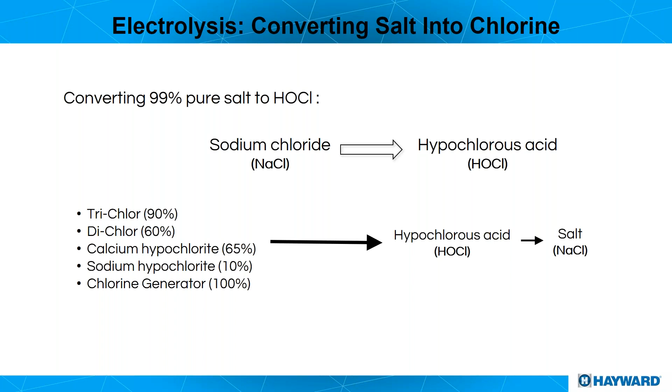How do we do this? We just have to add chlorine and salt to the pool, and the chlorinator will convert the salt into chlorine by separating the molecules. As we know, salt is made of chlorine, and that's the way this is going to happen. Simply, we're going to add salt to the water and mix it in.

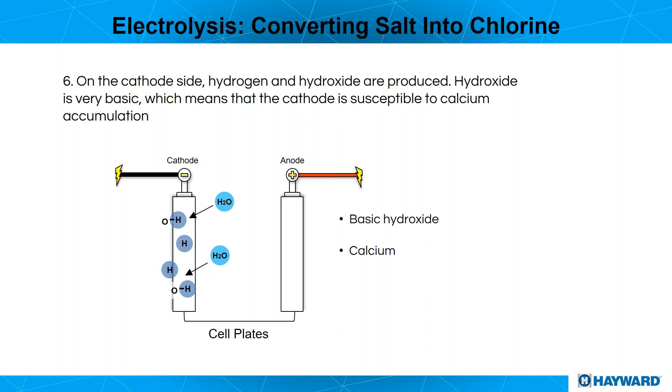There are some plates inside the chlorinator cell that have negative and positive sides, because they use electrolysis and electricity, DC voltage, to separate these molecules. On the side where we have the negative plate, calcium will accumulate. On the positive side is where we separate the molecules of the salt. As you can see, it becomes very negative, the pH becomes very low, and that breaks up the molecules, producing chlorine.

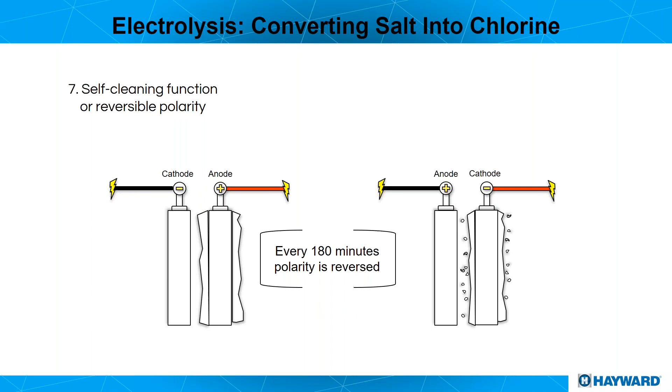Now these chlorinator cells have a 180-minute polarity reverse. In other words, every 3 hours the polarity reverses, which causes the negative side, which became dirty with calcium, to become positive. That way the chlorinators clean themselves - they are self-cleaning cells or plates because of the polarity change.

Now let's talk about chemistry and salt. A lot of people ask, if you have a chlorinator pool since it uses salt, does that mean the water is going to be very salty like ocean water? It is not. Here we can see the parts per million: ocean water is way higher, 35,000 plus, compared to a chlorinator pool, which only requires about 2,500 to 3,400 maximum.

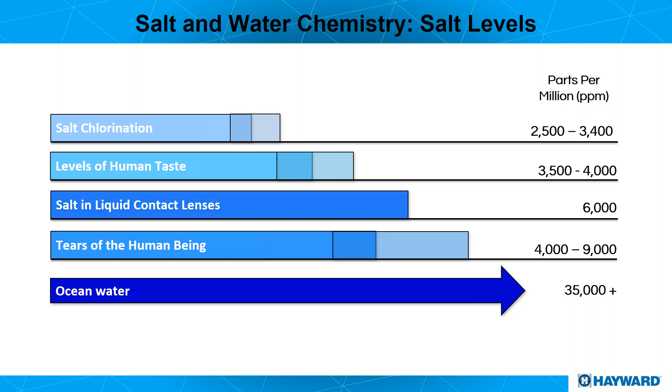If we have a new pool, here's what we need for initiation and verification. We need to make sure the pool is clean and the chemicals are balanced. Then we check our salt level, making sure we're around 3,000 to 3,200, and that we have stabilizer in the pool, a maximum of 50. Stabilizer is very important, because without it our chlorine production will evaporate quickly. On existing pools, we need to make sure we have some kind of metal remover.

After time, there are going to be metals inside of the pool. Same thing, check the salt level. Before we add salt to the pool, we need to make sure what we have, because after time, pools will accumulate salt that comes from the wind, from the sweat of a human, and from other places also.

And then also check our stabilizer level to make sure we are in range. After we have this installed, we just turn on the equipment, and at first the equipment will show 2,800 parts per million. Just give it 24 hours so it can stabilize itself and give you an accurate salt reading.

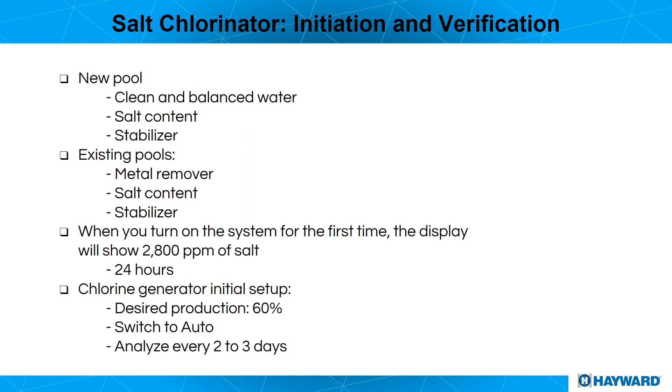Here we can see the table of all the chemicals or the chemistry that we recommend. For salt levels on residential pools, we need about 2,700 to 3,400. If it's not in that range, if it's below, it will give you a very low salt alarm. And if it's high, it will give you a high salt alarm.

Free chlorine, we want to keep it between 1 and 3.0. If it's below, then our pool can get green and be unhealthy. And if it's above, it could produce some kind of irritation in our skin because of too much chlorine. So let's keep it in that range.

pH, same thing, 7.2 to 7.6. Below that, it will corrode anything that is metal. If it's above, it can cause two things, either calcium deposits or irritation in our skin.

Stabilizer, we need to keep that between 20 and 50. If it's below that, chlorine will evaporate fast. And if it's above that, chlorine will be blocked. The stabilizer will cause a lock, causing the chlorine not to do any work. So let's keep it between that range.

Alkalinity between 80 and 120. If we don't have it in that range, then our pH will be unstable. So that's very important too.

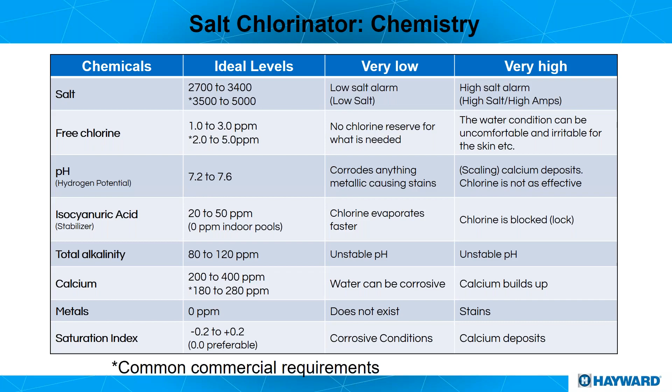As we know, there's two things that will affect our chlorine efficiency. One of them is a high pH, so we need to make sure that's stable. And another thing that is not here, but I want to mention, is high temperature. When temperatures are high, for example in spas, our chlorine efficiency will be less because of the high temperature of the water. So those are the two things that will affect our chlorine efficiency.

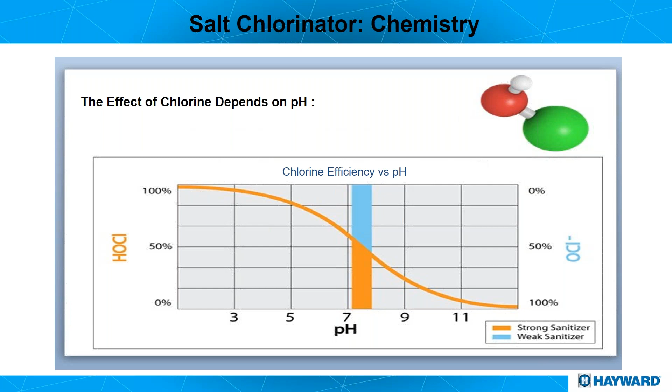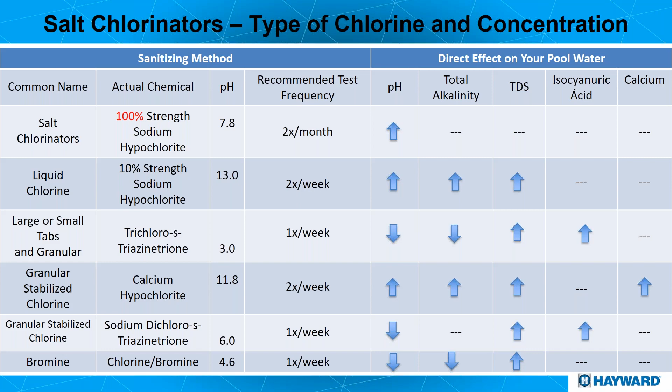And then if we talk about dichlor, dichlor will tend to bring our pH down, our TDS up. It will not affect our alkalinity, and it will bring up our stabilizer. And then bromine, which is mainly made for spas, that tends to bring our pH down, our alkalinity down, and our TDS high.

What types of salt do we need to use for a pool? Simply salt that is 99% pure. You can find this kind of salt anywhere they sell pool equipment, and it's salt already made for pools, so there's not much more to say. If you use that, that's perfect. If you don't, you need to make sure that it's 99% pure.

We recommend not to use the big one, the kind that has little rocks of salt, since it's a little bit hard to dissolve in the water. So the finer it is, the easier it's going to be to dissolve in the water.

Here we can see a salt addition table. You can find this in the installation manual. Otherwise, you will receive this kind of information by email by next week. Here you can see that table, depending on how much salt we have and how big the pool is. This will tell you how much salt to add.

We recommend that you don't add exactly what you see here. Add a little bit less, and then check your pool. If your pool's salt level is a little bit low, you can add more. We just don't want to go above the maximum, because if you do, you're going to have to drain the water so you can add fresh water to dissolve the amount of salt in your pool. So just keep that in mind.

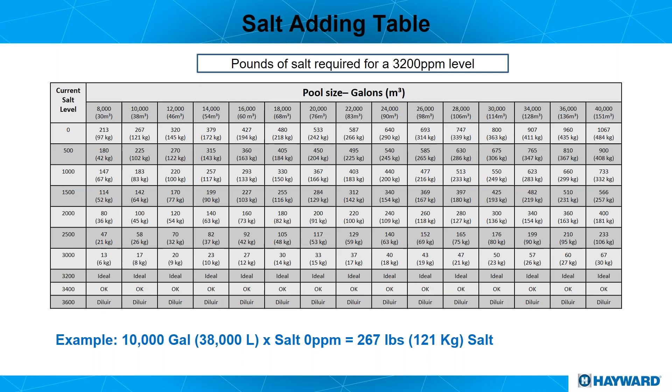Just make sure that you keep this little tube or container in a fresh place, out of the heat. Whenever you pull one of the strips, make sure you close it right away so you can keep them fresh. Remember that these strips will expire after 3 or 4 or maybe 6 months, so try to keep them cool and use them quickly.

Let's talk about the benefits of having a chlorinator. There's a lot of benefits to this. First of all, you're going to be avoiding spikes in the chemistry of the water.

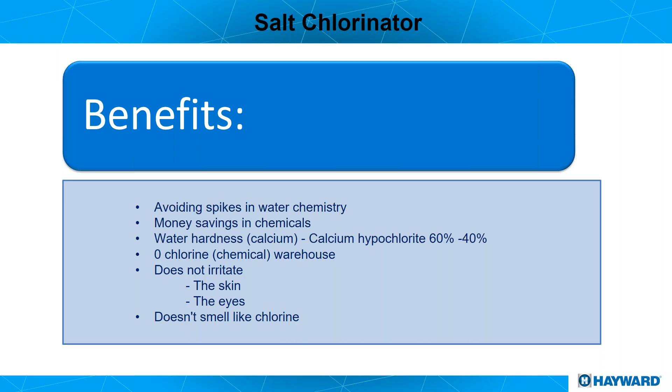Let's talk about products. We have several products in the market, and here you can see them in the picture. We have the AquaRite 900, AquaRite conventional, and the BlueEssence. At the bottom we have AquaRite Pro and AquaRite 100. We'll talk about those in a second.

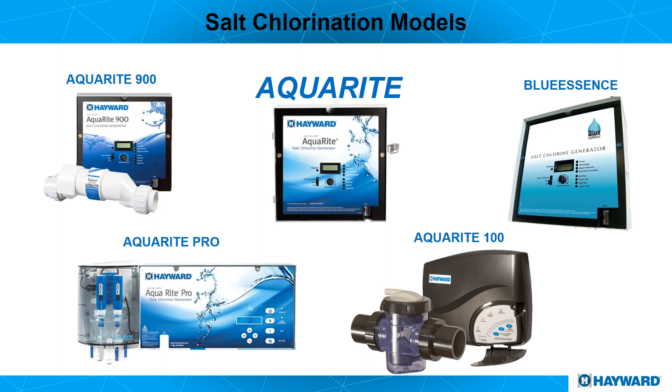Let's talk about the first three ones on top. What is the difference between these three chlorinators? Well, AquaRite, which is the one in the center, has been out on the market for several years. Hayward created the AquaRite 900, which is a very similar product, but with a chlorinator cell that lasts about 25% more.

We know that chlorinator cells have a life expectancy just like a light bulb, so after that they have to be replaced. The AquaRite 900 has a cell that lasts about 25% more than a regular AquaRite, so for the same price you're getting a better product. This AquaRite 900 is not being sold on the internet, only through distribution or dealers, so that's a good thing for everybody in our countries.

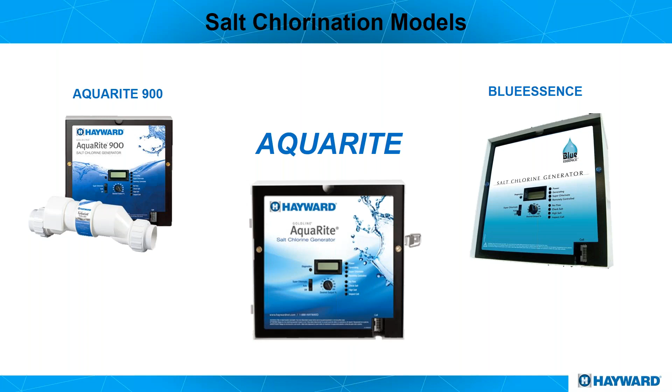Now, BlueEssence on the right side is going to be the same thing as an AquaRite, different label, but it's going to have a better price. I'm thinking it's probably around 30% cheaper. So it's a really good product, just like a regular AquaRite, but at a better price.

Let's talk about the BlueEssence for a little bit. We have two different models. BlueEssence 20, made for pools up to 20,000 gallons, produces 0.76 pounds of chlorine in 24 hours, or 345 grams. Then we have the BlueEssence 35, made for pools up to 40,000 gallons, which produces 1.45 pounds of chlorine, or 658 grams.

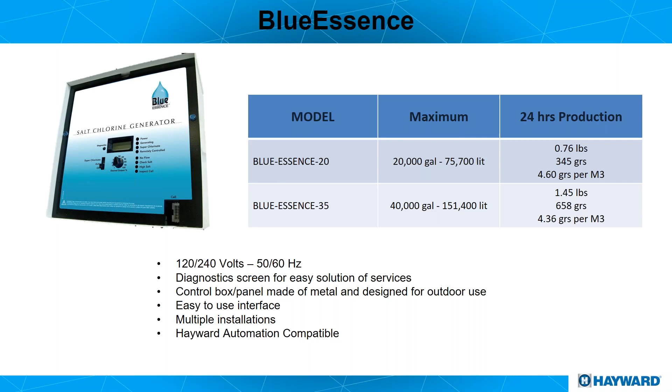It is the same thing as an AquaRite: 120/240 volts, 50/60 hertz, diagnostic screen, control box panel made out of metal, and easy to use interface. We can do multiple installations if we want to, and it can be compatible with automation by Hayward.

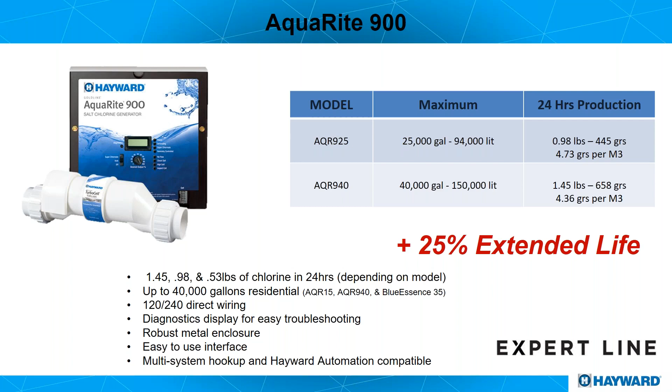AquaRite 900, we have two different models: one for a 25,000 gallon pool, and another for a 40,000 gallon pool. The specifications of the panel are pretty much the same, same screen, same metal panel, and you can also install it with automation by Hayward. The only difference here is that the chlorinator cell itself has a 25% extended life. This product is also not sold online, which is good for distributors and dealers.

If we have to replace one of these chlorinator cells, we can do it. We can place any cell in every one of our systems—it doesn't have to be a specific cell for an AquaRite 900 or for a BlueEssence. Here we can see the reference. All we have to do is program the panel for the correct cell, and you will see that in a little bit.

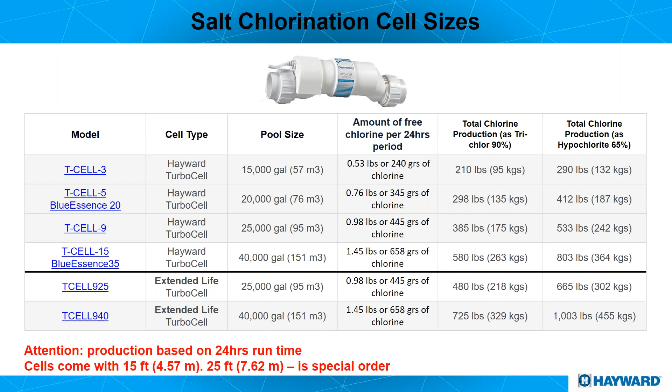Let's talk about operation. First, in the screen, you will see what we call the average salt level. There's a little button that lets you jump between diagnostics. If you ever have a problem with the chlorinator, this will be really important to know so we can determine what the issue is. For example, if you press the diagnostic button once, it will jump to number 1 on the screen, which in this case gives you a 73—that's the temperature of the water in Fahrenheit.

If we want to change this to Celsius, there is a toggle switch, as you can see here. Let me talk about the toggle switch. It's got 3 options: off, meaning the system is off; automatic, meaning it respects the production, and the production of chlorine goes by this little wheel or knob—so depending on where you set this, that will be the production of the chlorine.

Now, what do I mean by production? The chlorinator changes polarity every 3 hours, for example. If we put it at 50%, the first hour and a half of those 3 hours will be producing chlorine, and the second hour and a half will be resting or off. So that's what the auto part means—it respects that cycle.

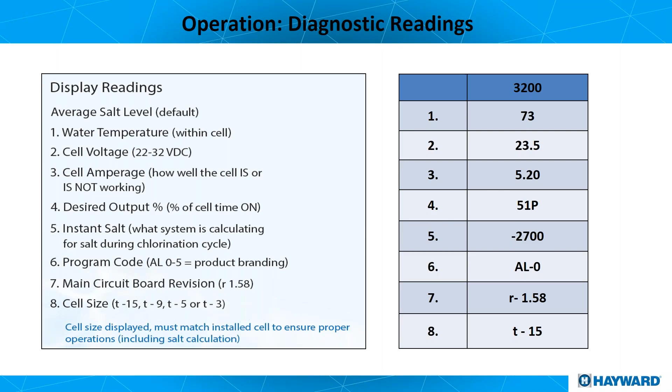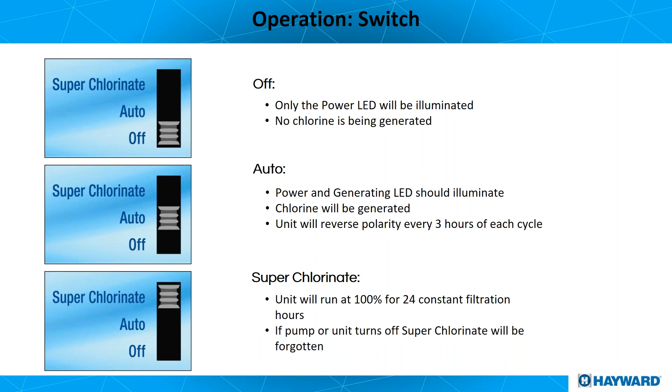In order to change this, all we gotta do is, when we see that on the screen, move the little switch from auto to superchlorinate and back to auto, and it will change. So keep that in mind so we know that everything's programmed correctly.

Every single one of these systems I've been talking about, BlueEssence, AquaRite 900, or the conventional AquaRite, has the same little LEDs that indicate any issue with the system, or simply that everything's perfect.

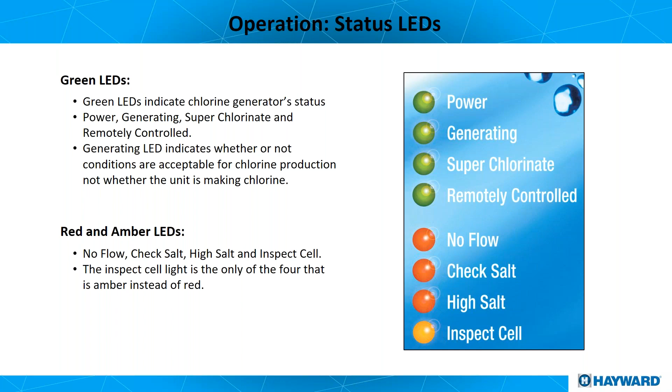The first 4 lights on top are green. The first one means power - we have power, it's energized, breaker is on. The second one means it's generating - whenever the chlorine cell is generating chlorine, this light will be on. If we put it to super chlorinate, we'll see that third green light on. And the last green one, if connected to automation, will light up saying remotely controlled, meaning automation like OmniHub or OmniLogic is controlling the chlorinator.

For the lights on the bottom, the first one is flow or no flow. This light has two functions. Whenever you turn it on, this light will be flashing for about a minute because it's trying to read the flow of the water - that's totally normal. After a minute, it will go off.

If the light is solid red, that means we have no flow. In that case, we've got to check that our pump is on, it's got a full prime, the filter is not dirty, maybe a valve is in the wrong position, or otherwise check the flow sensor to make sure it's not broken, or maybe the connection on the panel could be loose or corroded. We can check those things with this kind of diagnostic.

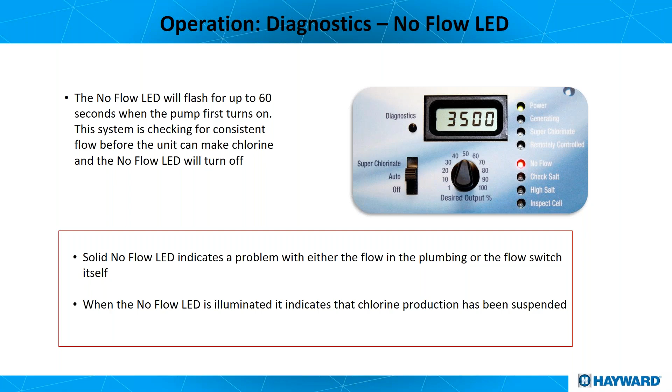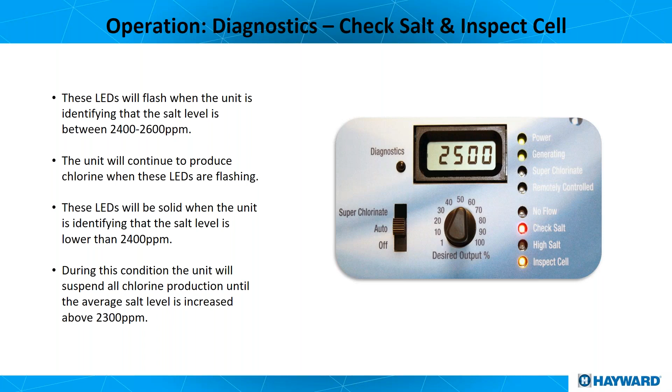If we have a check salt light, that also has two functions. If it's flashing, that means we are low on salt but still working, so it's time to add salt. If it's solid red, that means we are definitely below the minimum and need to add salt before the system works. When flashing, it will still be producing chlorine. When solid, it will not be producing chlorine because there's not enough salt. So it's a matter of adding salt, and we should be done.

And then we have high salt, which means we are above the maximum. Now let me give you a little tip here. Before we add salt, or before we drain the pool because we had too much salt, I recommend we test the water with some secondary method, like a little salt strip, just to make sure the system is reading the correct salt level, just for giggles. Every 3 months or every 6 months, we should do a little test on the side so we know the system is working and is actually accurate.

And then we have inspect cell. We have two functions with this little light. If it's flashing, that's normal - it will appear every 3 months, or actually every 500 hours of working, just to tell you it's time to inspect the cell. Take a look - if it's dirty, clean it. If it's not, don't clean it, just put it back in the plumbing.

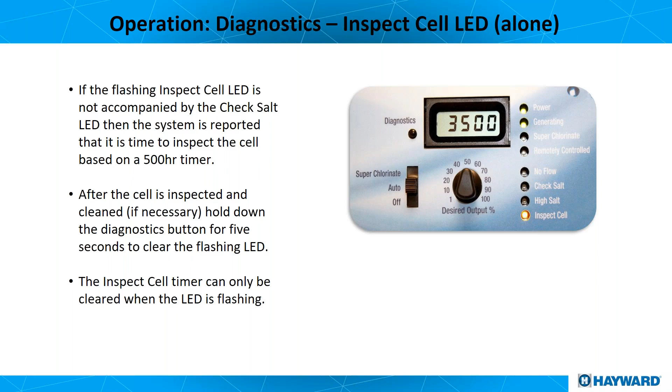To reset the light, we just press the diagnostics button next to the screen for 5 seconds, and it will disappear, then come back on after another 500 hours of work time. If it's solid, then we definitely have an issue, and most likely the cell is dirty, or the cell has come to the end of its life. So when you see it solid, check your salt level, make sure everything's perfect, and then inspect the cell and clean it if necessary.

If we want to connect this to automation, to an OmniHub, we can do that now - we just need this little board. As you can see on top, this board is the communication between our salt chlorinator and our automation, either OmniHub or OmniLogic. This board has two little connectors with 4 wires. The one on the bottom connects to the board itself, as you can see the board has a plug for that, and the top one goes to our automation system. That way we can control everything through automation.

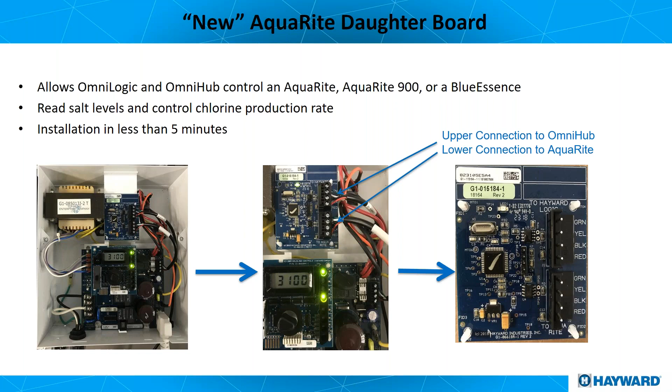Through our cell phone, we can see the salt level, raise the production, or see if we have a little issue with the system too. So we can see everything from even a cell phone.

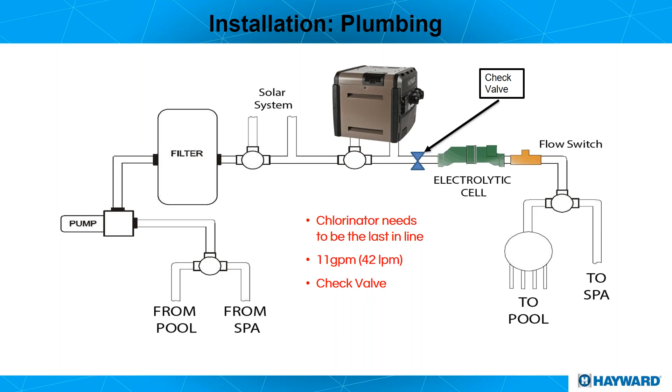For installation, if we talk about plumbing, we want to make sure the chlorinator cell is the last thing in line. We don't want free chlorine flowing through our heater, for example, so it needs to be almost at the return line going to the pool. We also recommend a check valve to provide blockage so the chlorine level, when the pump shuts off, does not back up into our heater, accumulate in the heat exchanger, and damage it. So a check valve is recommended. Also, the cell has a minimum of 11 gallons per minute. Keep those things in mind for a good plumbing installation.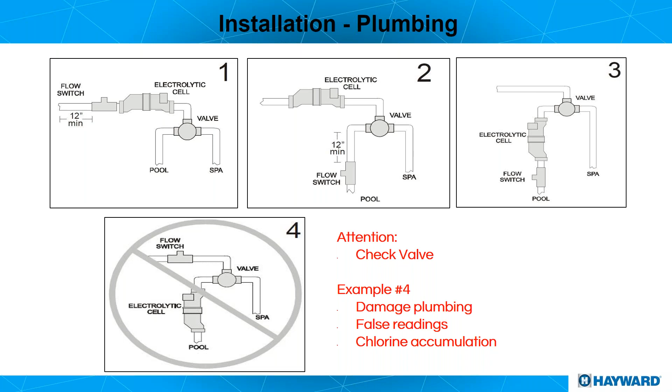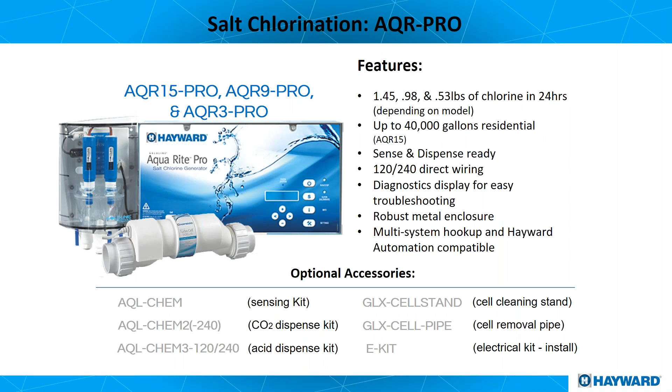Now here you can see the specifications, also 120 or 240 connection. Different types of cells that you can put into this system. It goes up to 40,000 gallons, metal case, so we have no issues with that. And also it can be connected to automation.

There are 4 little buttons: simply to turn on the power of the system, super chlorinate, read all the diagnostics with that I button, and then settings and configuration, where you can set up what pH level you want and at the same time what chlorine level you want through ORP.

For this system, you can add any of these items. For example, an acid tank, or if you want to control your pH through CO2, you can put a CO2 kit. We also have a dummy cell, electrical kit, cell cleaning base, and obviously the sensor kit that you see on the top left.

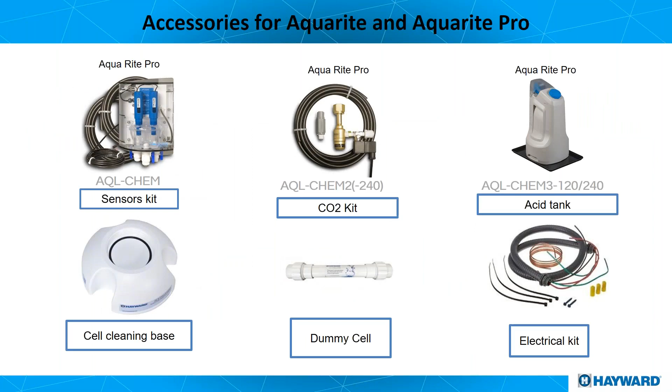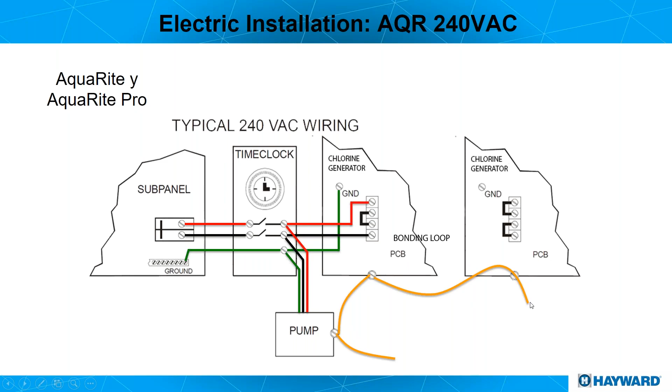Make sure when you do this connection, the chlorinator can be connected on the outside of the time clock or the output, so that when the pump comes on, in case of single speed pumps, the chlorinator will be on. We can do that, but what I do want to mention is that every one of our systems, besides ground, needs to be bonded. You can see here that we have a bonding wire on the bottom of this picture, and on the next one I'll show you, we also have that bonding wire. That is for safety, so keep that in mind, please.

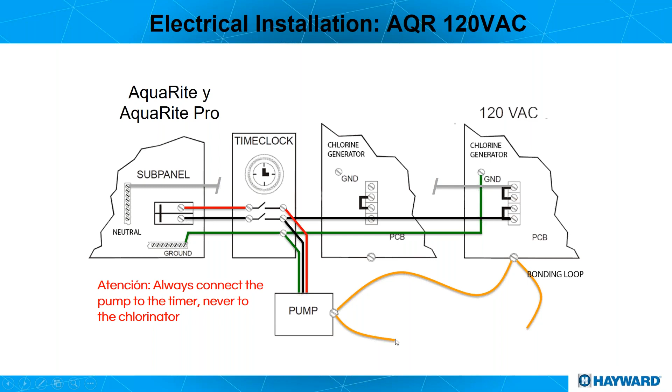Grounded and bonded. We can see here a connection for 120 that also has ground, which is the green wire, and then also has bond.

Let's talk a little bit about AquaRite 100. This is a new product. This system is made for pools up to 30,000 gallons or 87,000 liters size-wise. It produces 1.2 pounds of free chlorine in a period of 24 hours, or 544 grams. This system, besides that, is plastic, so that's good for salty areas. It can also work within a bigger range of salt, going down to 1500 parts per million and still work, or up to 4500 parts per million. This chlorinator is ideal for fiberglass pools or vinyl pools, and also for small concrete pools.

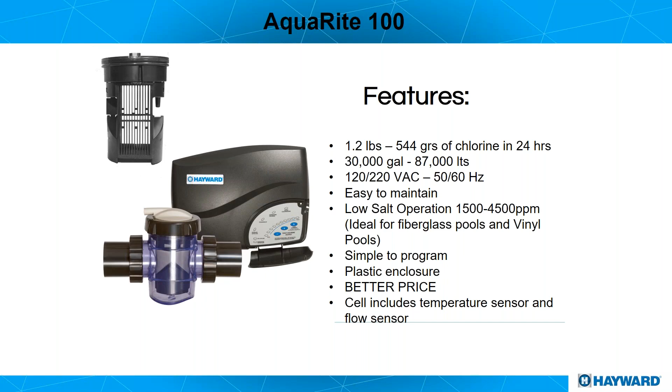The little body of the cell is see-through. That way we can see when the cell is dirty without having to pull it apart. And it's a very simple installation.

Let's talk about that. All we got to do is simply mount the controller on the wall, 2 screws on top, maybe 1 or 2 on the bottom to hold it in place. You plug it into the wall or into a breaker, and then you do a little bit of plumbing. You plug the cable or the connection to the cell, and you're good to go. Very simple unit, very simple to install.

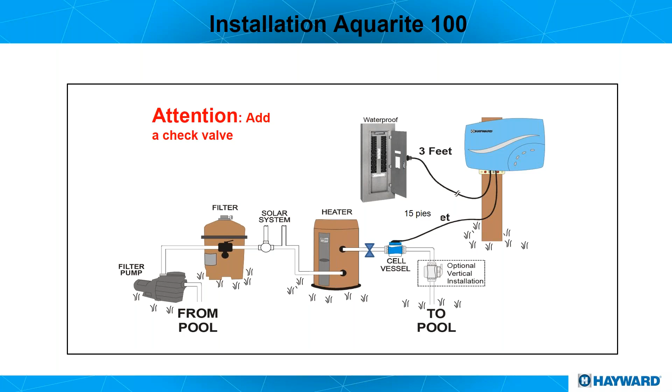If we've got to do a 120 volt connection, that system comes with 5 wires. The green one we know is ground, and then we use the white one, which is neutral, with the red one, and we attach it to the neutral. On the high side, or the hot side, we use the 2 dark wires, the black and the purple. That will be a connection for 120.

If we do 240, then we use the black for 120 and the red for 120. The green is ground, and then the purple and the white ones, we just wire nut them, and we're good to go. Very simple connection.

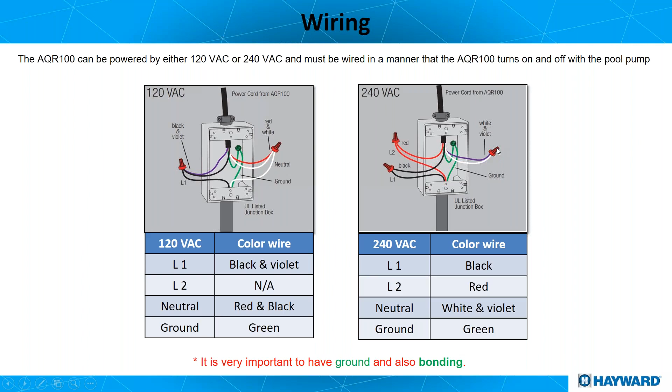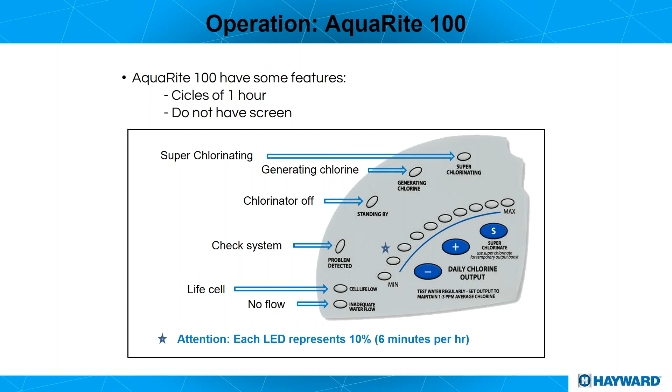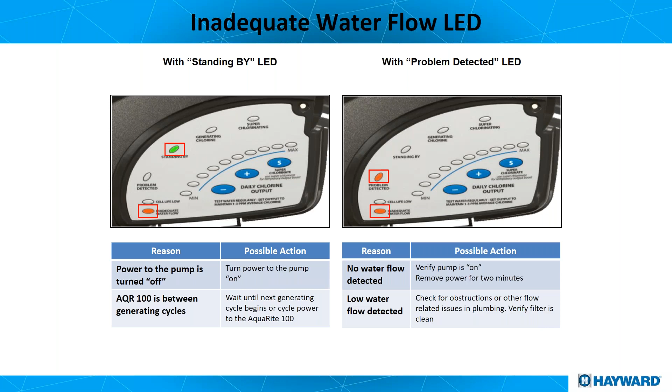In diagnostics, we're going to send you this little manual. It simply tells you if the standby light comes on with no flow, then we've got to check the flow. But if we have a problem detected light on, it will be related to one of these lights from minimum to maximum.

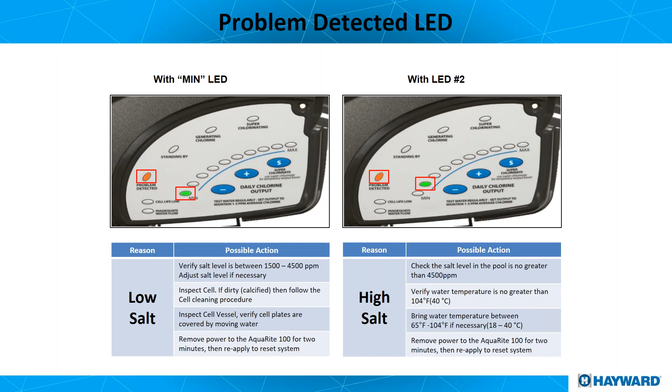For example, problem detected on with minimum light on means that we are low in salt. Number 2 will be high in salt. Number 3 means we have a problem with input power. Number 4, a problem with the temperature sensor. And numbers 5, 6, 7, and 9 indicate some kind of internal error.

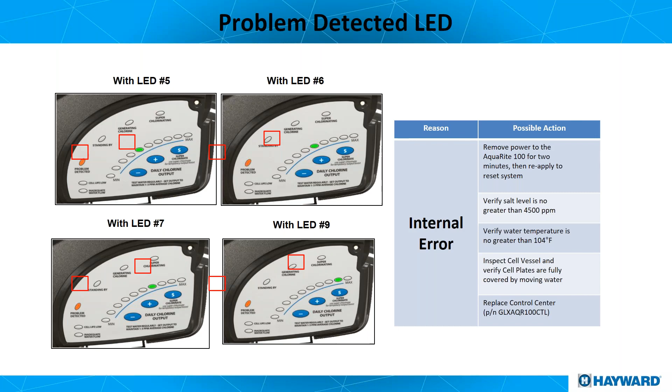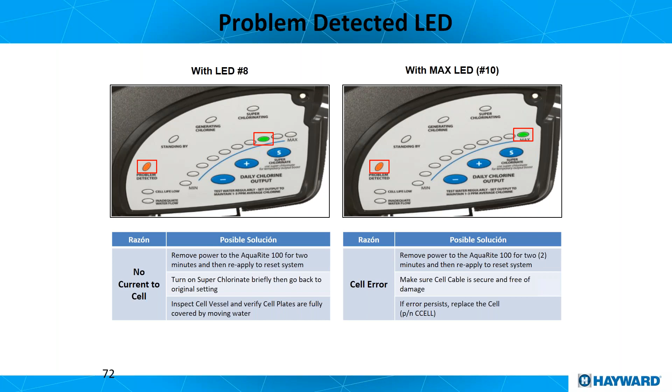Those are the possible issues, and all we've got to do is follow the instructions. At last we have number 8 and number 10. Number 8 means there's no current to the cell, most likely the plug is not plugged in correctly, and we need to fix that. Number 10 means the chlorinator cell could be bad and needs to be replaced. So, very simple diagnostics to follow.

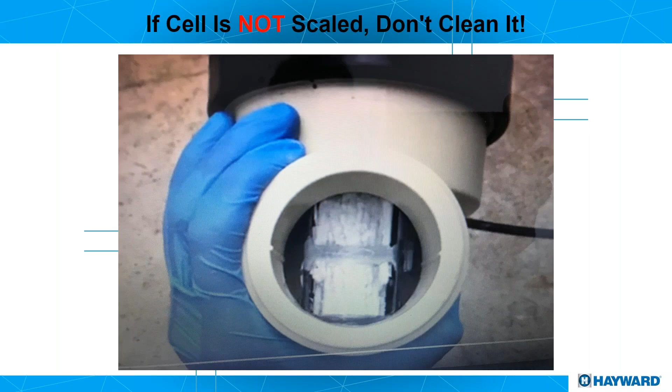And almost at the end, maintenance. What do we do with the cell when it's calcified or scaled? We need to clean it. And if it's not dirty, please don't clean it. We don't want to keep our cells inside muriatic acid if it's not needed.

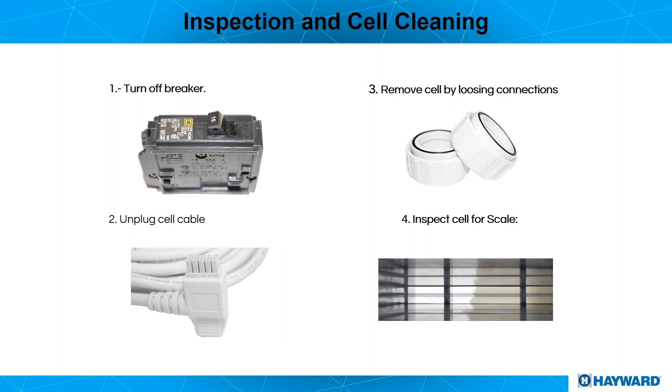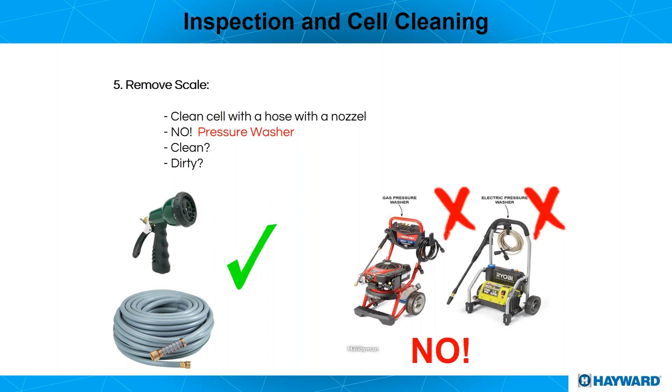So what do we do in order to clean it? Simply turn off the breaker or turn off the pump, remove the cell from the plumbing, unplug it, and then inspect it. If it's dirty with leaves or something like that, just use a hose and spray gun and rinse it out. Do not use pressure wash machines, too much pressure will affect our chlorinator plates.

If it does have calcium buildup, we have to use a mixture of water and muriatic acid to clean it. All we have to do is use the base or just a bucket and submerge the cell for about 20 minutes, maximum 1 hour. Don't leave it overnight or the whole afternoon, because muriatic acid will destroy anything metal over time. So no more than 20 minutes, or maximum 1 hour if it's very calcified.

If you're going to clean one of the cells for the AquaRite 100, keep in mind that we cannot submerge the entire cell inside. Just make sure, as you can see on the right side, to put it in only up to the blue area shown here, just enough to cover the plates, since we don't want the electrical connection on top submerged in acid.

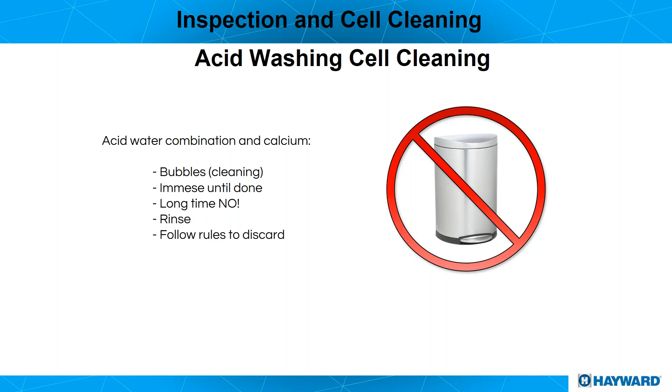So keep that in mind for this kind of chlorinator. After that, you have to follow the codes for getting rid of the acid you used. Most likely you'll have to stabilize it or bring the pH up until it reaches 7.0, and then you can dispose of it.

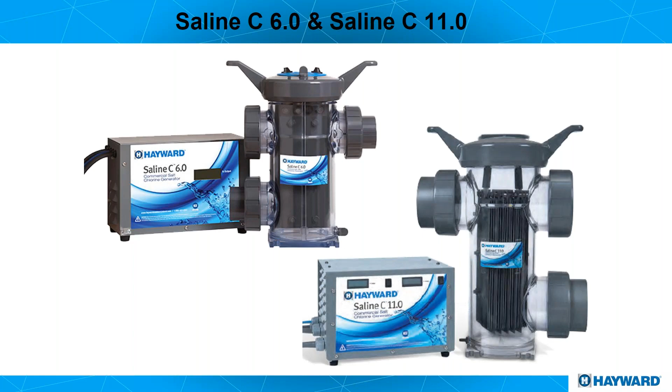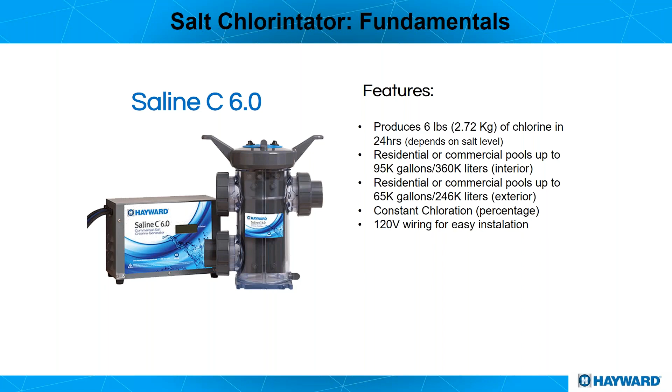Now let's talk about commercial products. In commercial products we have 2 chlorinators: the Saline 6.0 or Saline 11.0. The 6.0 will produce about 6 pounds of chlorine in 24 hours, 4 times more than any of our chlorinators that go up to 40,000 gallons. Since this is commercial, we recommend it for pools up to 65,000 gallons outside in the open, or 95,000 gallons if inside a room. It comes in a metal box with a 120 volt connection only, so keep that in mind.

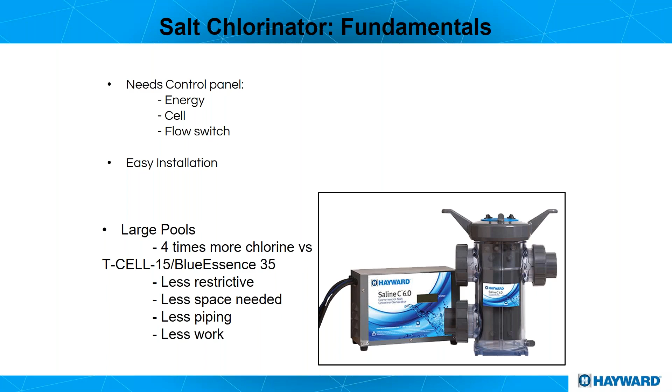Here you can see it has a chlorinator cell plus the power center and flow switch, producing 4 times more chlorine than our biggest AquaRite, which is for a 40,000 gallon pool. It's easy to control, with a screen and just 1 button, which lets you go up and down with the production rate or simply reset the system. There's not much else to do here.

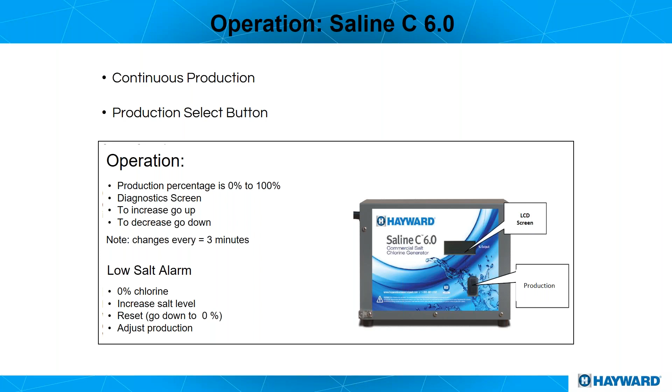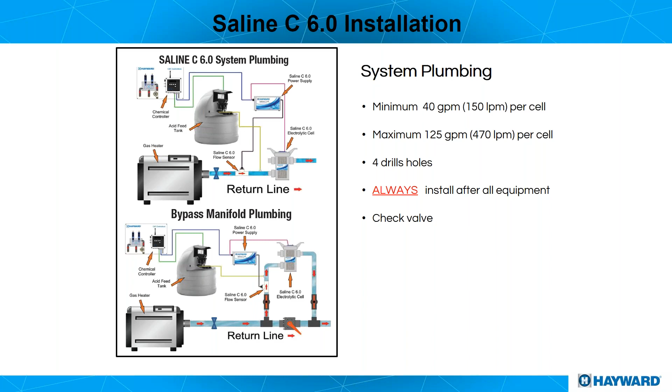The Saline 11.0 will produce double what the 6.0 produces. It also comes in a metal box, and pretty much everything else is the same, but there's a big difference in the cells—this one is a lot bigger. It uses 4-inch plumbing with a maximum flow of 250 gallons per minute, while the 6.0 uses 2-inch plumbing.

So this is great for commercial use. If you don't want a lot of conventional AquaRites in line, we can use just one of these big ones, and it will do the job 4 to 8 times faster than a regular AquaRite for 40,000 gallons.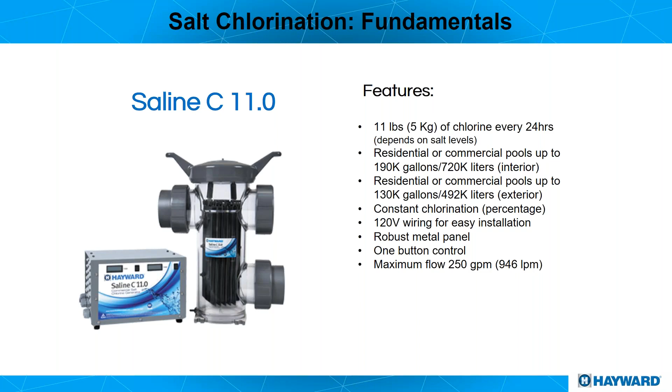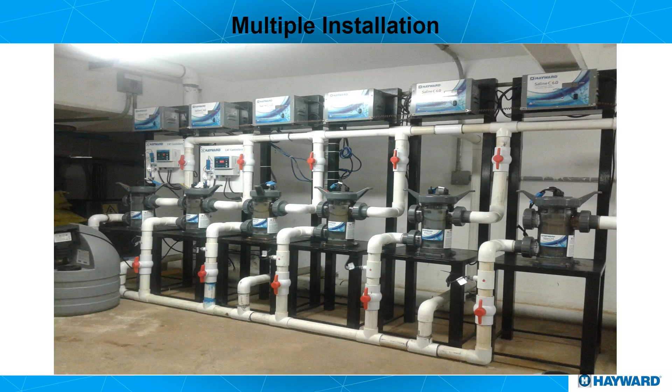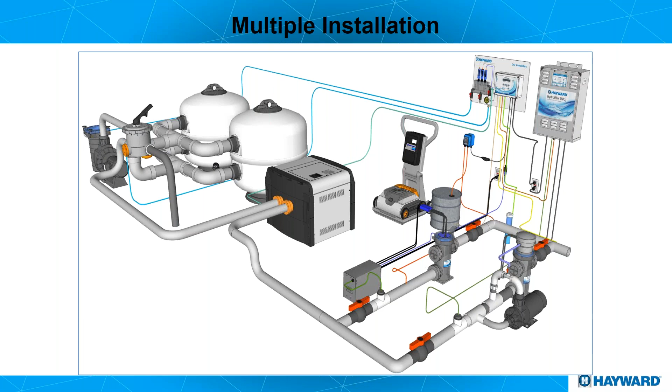Here you can see a nice installation with several Saline 6.0s, very clean, all installed in parallel, which is very important. Here at the bottom you can see an installation with 2 of them—in this case a UV system and a chlorinator cell—again installed in parallel. That gives an equal amount of flow to each unit, resulting in less pressure and less TDH, or total dynamic head, back pressure for our pump, which helps the system.

And almost at the end, we have this new UV system. It kills 99% of all microorganisms. If we use this system together with chlorination, that's great because it will reduce the amount of chlorine we use by 50%.

As you can see, it has 4 inlets on the bottom, 4 outlets on top, and comes with up to 3 UV bulbs. These UV bulbs are rated for 40 gallons per minute, or 152 liters per minute, each. So if we put in 2 bulbs, we have enough UV for 80 gallons per minute of flow, or 320 liters per minute.

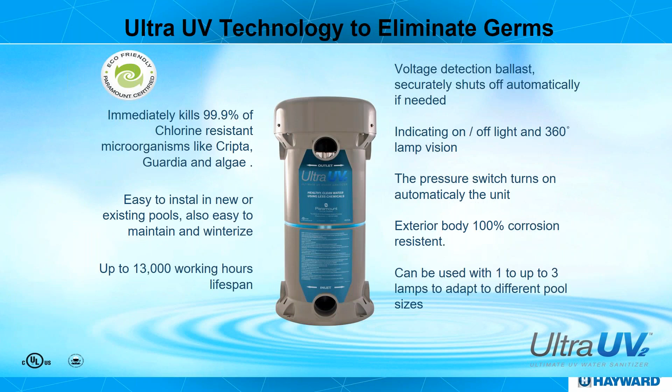Life expectancy of the bulbs is up to 13,000 working hours. This system will be great to reduce the amount of chlorine. You have to remember that these systems will kill anything that goes through them, any germs, anything that goes through those bulbs, it will kill it. Now, this is not going to be a replacement for a chlorinator or even for just regular chlorine, because we still have to have some kind of chlorine in the pool, some residual that will be killing the bacteria when this water is not flowing through this UV system.

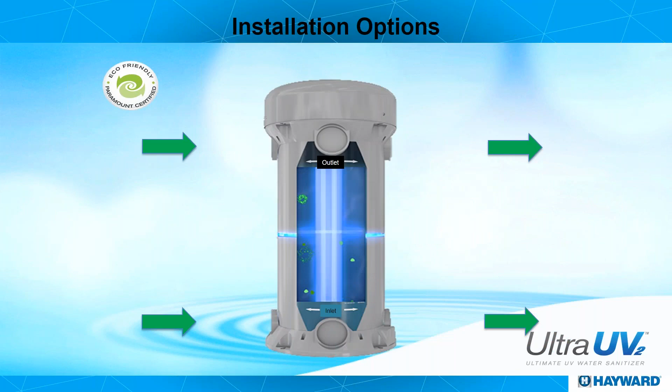There are 4 inlets, you can plumb this whichever way you want, but we recommend that the water flows from the bottom to the top, so the outlets will be on top and the inlets on the bottom. You can go one way, or come through the other side and go the other way. On the front, where you see outlet and inlet, you can also use these openings, or in the back it's got 2 more. So if you are against a corner, you don't have to come in from one side and go the other way. Simply come in from the bottom and exit on the same side on top, making it a lot easier for you.

It comes with caps, so if you don't use any of the rest of them, you can cap them and glue it. Also, if you need more flow, since these are 2-inch connections, you can use 2 of them to come in and 2 of them to go out, increasing the flow through the system. With 3 bulbs you can go up to 120 gallons per minute, so with 2-inch piping that's 40 gallons per minute per each one of these bulbs.

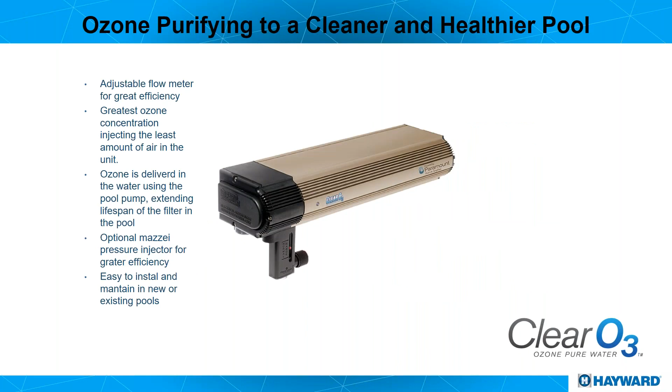We also have this new ozone purifier. This system will reduce your chlorine level up to 60%. It works great for pools up to 55 gallons... thousand. So you have this option of ozone, and the best thing of all, you can actually put them together. If you do that, we can reduce our chlorine level up to or down to 80%. That means if we spend, for example, 10 gallons of chlorine a month, now we're going to be using only about 2 gallons of chlorine a month.

These systems come with a really good price and very easy connection. We recommend the ozone to be connected before the pump, and the UV at the end of the system, even after or before the chlorinator, if we have a chlorinator cell for chlorine or salt chlorine. Very easy to install, very safe, and to have perfect water in the pool, this will probably be the most recommended thing, so we highly recommend it.

To summarize, we have several systems of chlorine generators. We also have the AQR-PRO that can control a pump to monitor our pH or inject muriatic acid. We have our UV system, and we also have an ozone system, or a combination of both, plus the Chlorinator commercial products. So we have a complete line with this.